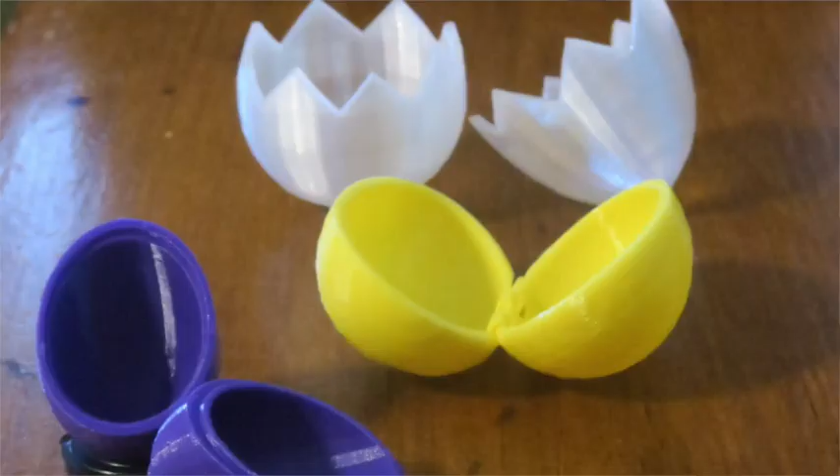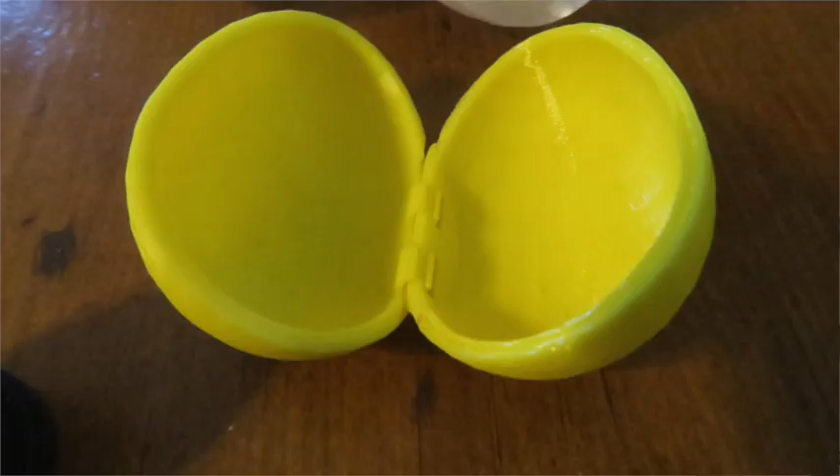In the second part, we're going to look at the second layer of our egg puzzle, and it's going to fit inside the first one. Just to remind you, our first puzzle was an egg shell with a zigzaggy opening, and inside this shell we're going to fit the second puzzle. For the second puzzle, we're going to make an egg that is cut vertically, and it's going to have a hinge so that it opens and closes like a door.

In order to do this, the first thing we have to do is actually design the hinge. This is a mechanical part, so we're going to design this and we'll have to make it relatively precise.

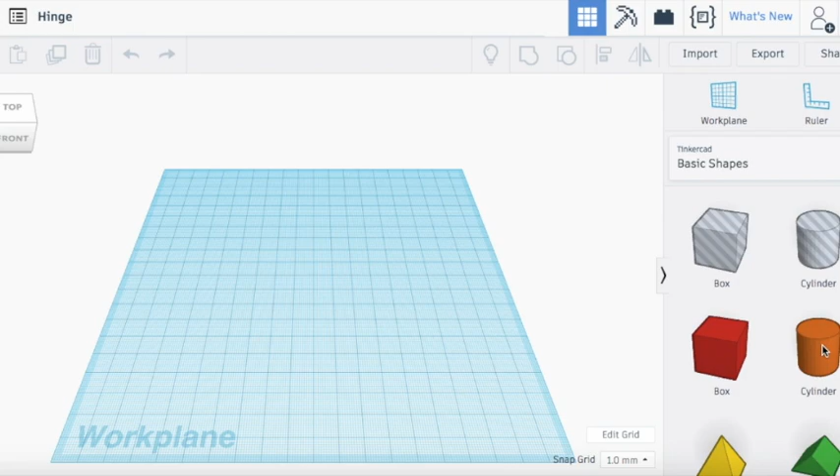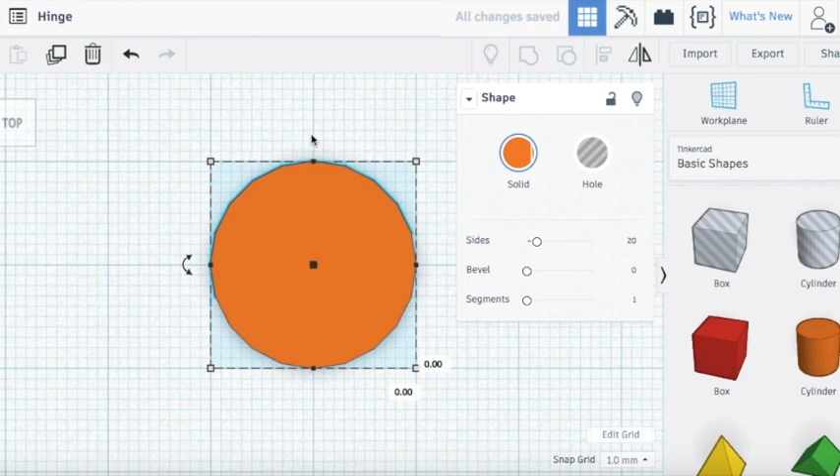So to construct the hinge, we're going to start with a cylinder. Again, just like before, I like to work in coordinates and be relatively precise. This cylinder has a radius of 10 millimeters, and I'll keep it 10 millimeters and make sure it's exactly centered on my work plane grid. My grid is set to 1 millimeter, so if I move things around, they always snap to 1 millimeter grids. I will also bring in two boxes.

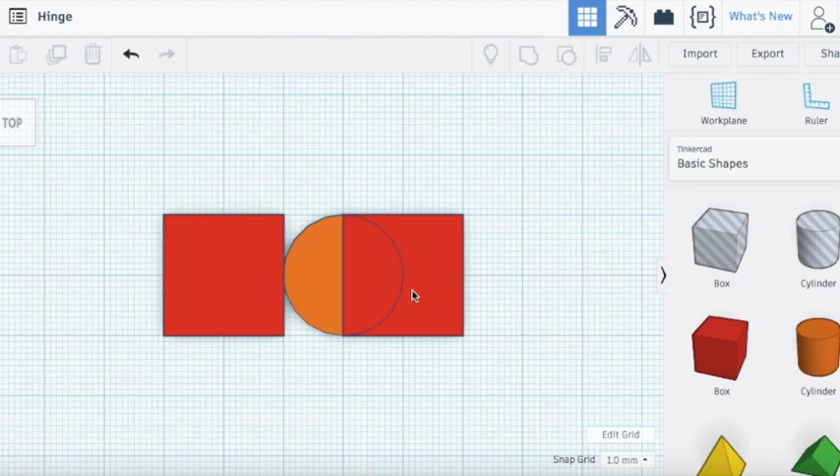One of them goes here and the other one will go a little further away over here. Let's switch to top view first. If I select all three pieces, I can center them. So this is going to be the basic shape of my hinge. This part will be fixed, this part will be moving, and it's going to move around this circle here. So let's construct an actual hinge out of this.

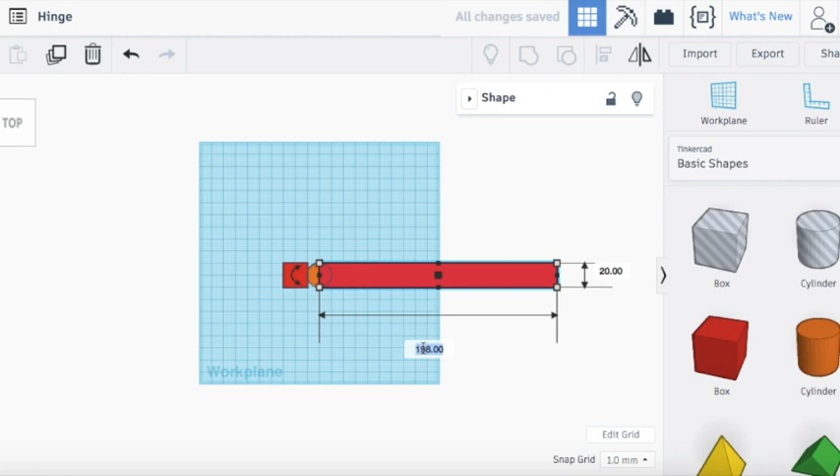I will make the hinge parts quite large, in fact much larger than they probably have to be. Let's keep the height at 20, but let's make the width, for example, 200 on this side, and I will do the same on the other side. So for this hinge, I'll just change the width. This little box here, I'll change the width to 200.

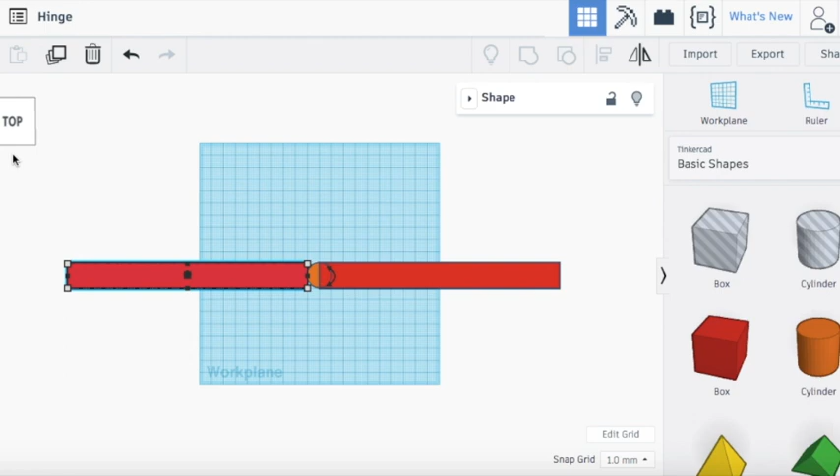Now, these two pieces, let's switch to front view. I will also want to make them much higher. I'll change their height to, for example, 300 - all three pieces. I'll change the height of the cylinder to 300, and I'll also change the height of the other piece to 300 as well. Well, actually, let's make it 400.

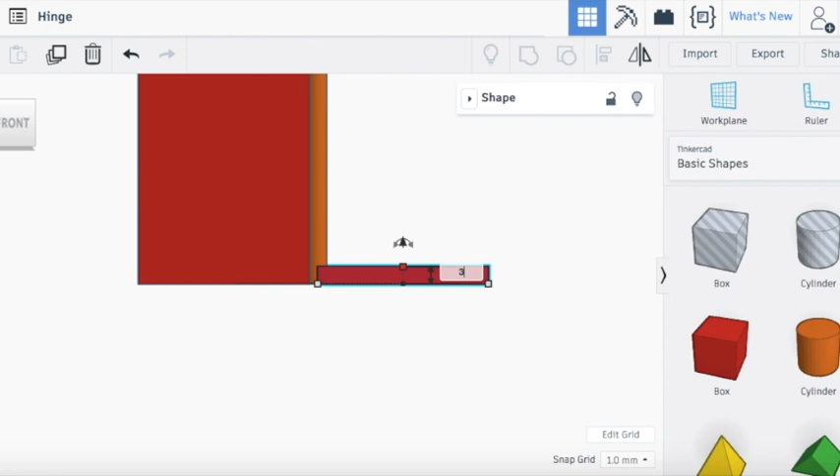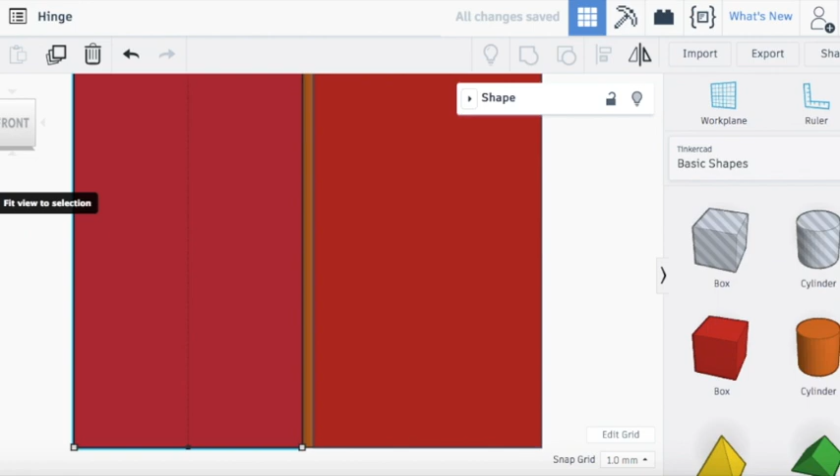That's even better. Let's make it 400 because it's really not a problem if it's too tall, but it will be a problem later on if it's not tall enough. So maybe 400 is a pretty good height for that. I'll also take all three of these pieces and bring them down a bit, by about 100 units, 100 millimeters. I forgot to select the cylinder, so I'm going to bring this one down by 100 units also. Everything snaps to the grid, so these numbers are precise.

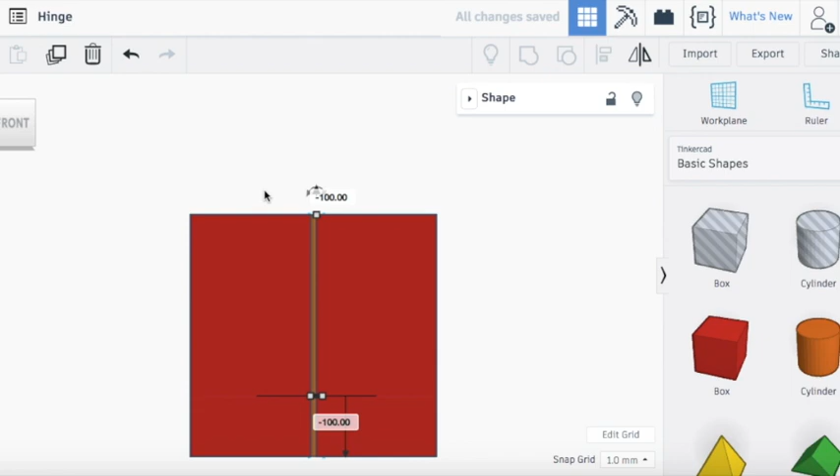Now, to make the actual hinge mechanism, for the time being, I'm going to hide this left piece so that we don't see it, and I'm going to work only on this right piece here. What I want to do essentially is cut two rectangular holes into this red shape.

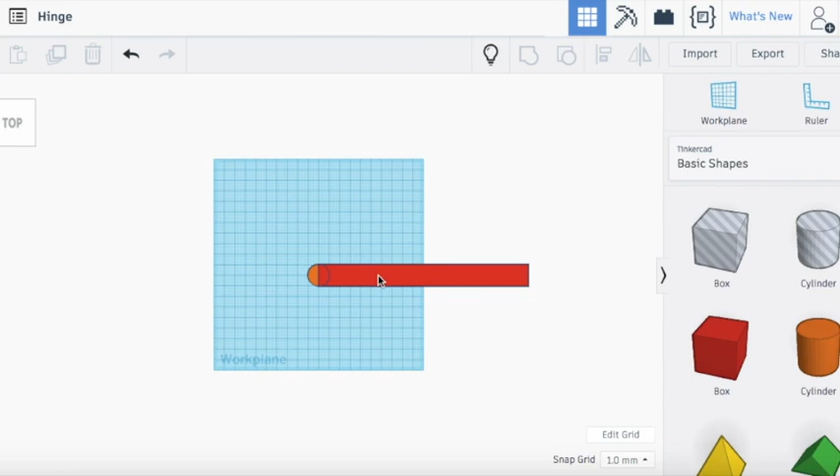So I will bring in - let's switch to top view actually - another box. What I'm going to do is make this cube a little bit bigger, let's make it 50 by 50. Right now I'm not worried about the height, but only about the width and the depth.

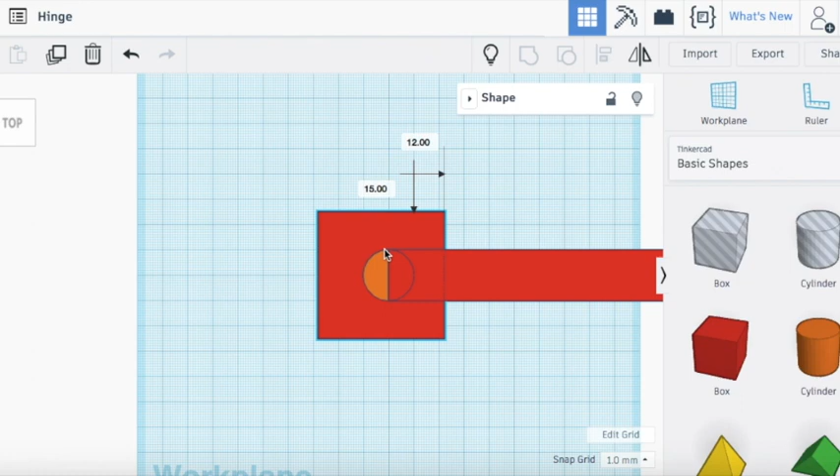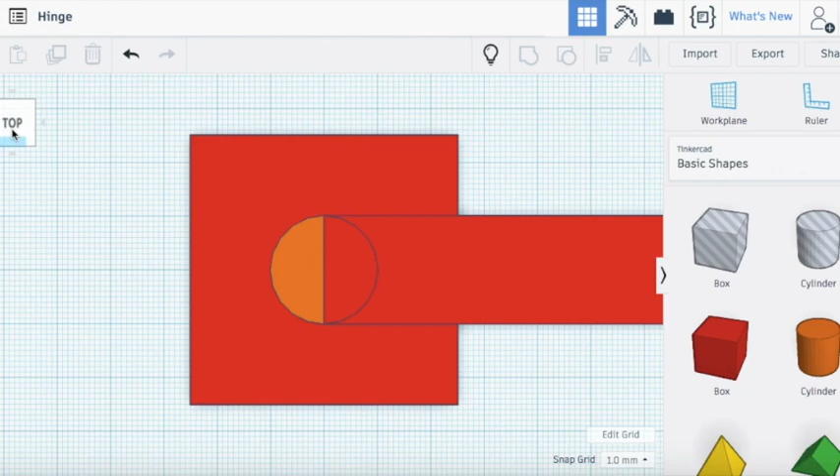So I will center the cube exactly around the center of my cylinder here. The way to do that is to zoom in on it and make sure this center is lined up with this line, and this center is lined up with this line. So I'm just going to move it a tad over and up, so now it's exactly centered here. And now let's switch to front view and worry about the height.

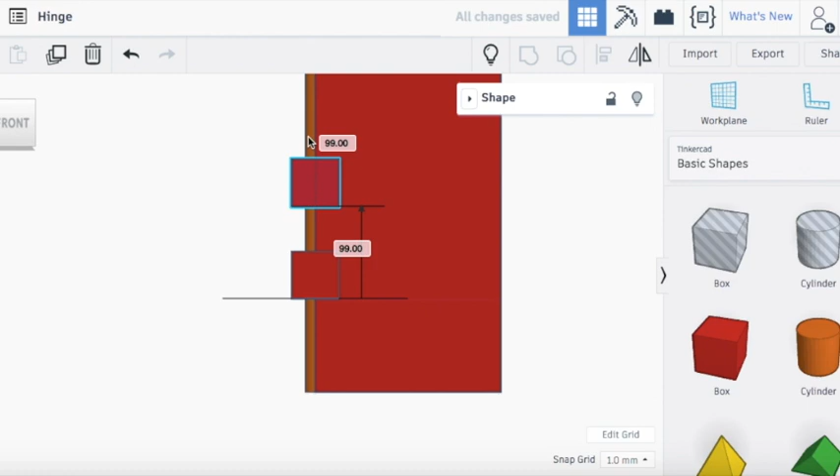50 millimeters is a pretty good height for the cutout I'm going to make here. So now I'll take this little cube, make a copy of it, and move the second copy 100 millimeters up. I want this to be exactly 100.

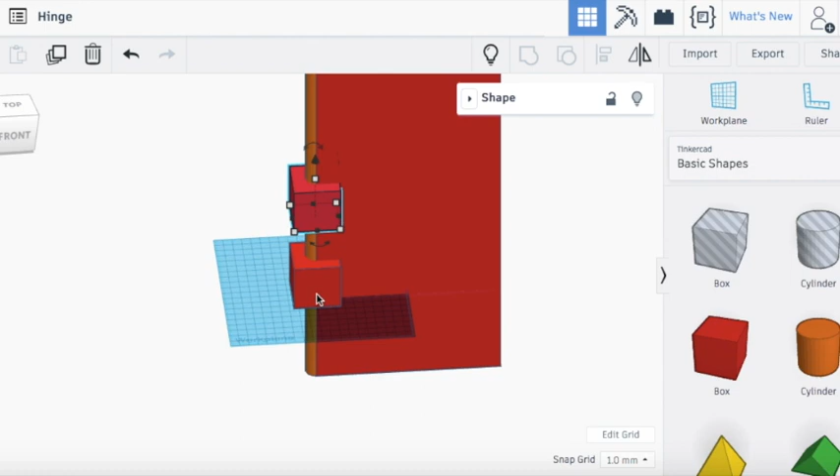In the three-dimensional view, I now have two cubes set into and around the cylinder, which is the moving part of the hinge. Now I'll select these two cubes using shift-click, which lets you select more than one piece. I'll change them into holes, then also select this wall part, and merge the three shapes. So now I have two cutouts exactly where I want them to be.

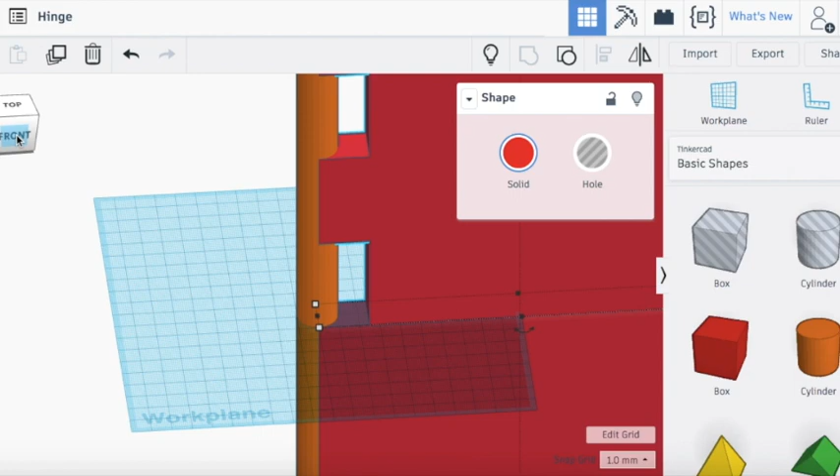Now that I've done that, I'm going to bring back the other piece that I've hidden. I click on the little light bulb here, and that shows all these pieces.

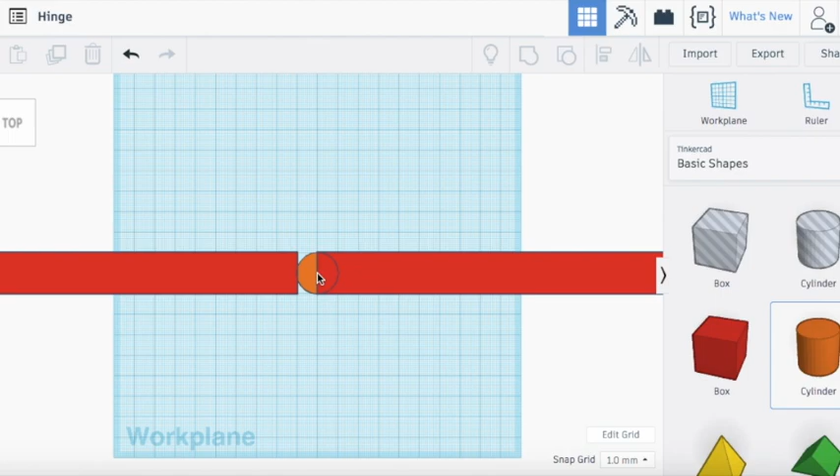So now we need to make the grips, the parts of the hinge that will actually grip onto this axis. I bring in another cylinder, and once again I'm going to center it exactly in the same place where the original cylinder was, except I'm going to change its measurement. Instead of a radius of 20, I'll give it a radius of 40.

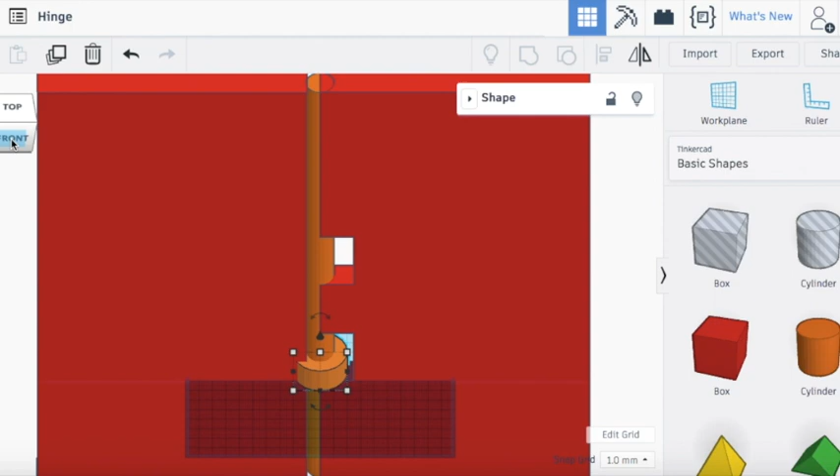In either direction. So now we have to make sure the height is correct. The size of these cutouts is exactly 50 millimeters, and I want a little bit to spare, so I'll make the height of the cylinder 40 millimeters. Then I'll also bring it up by 5 millimeters so that it sits exactly inside of this opening.

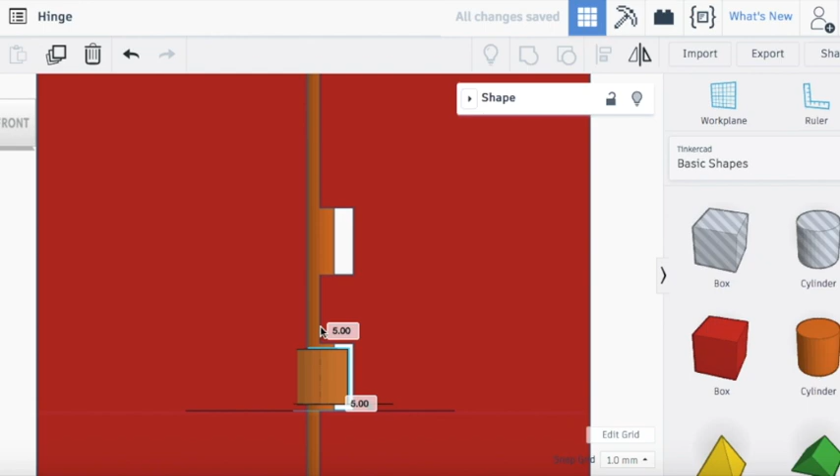Now I can duplicate it and bring the duplicated piece up by 100 millimeters. So it's up by 100 millimeters, and then it's 105 millimeters from the work plane, so it sits exactly inside of this opening here.

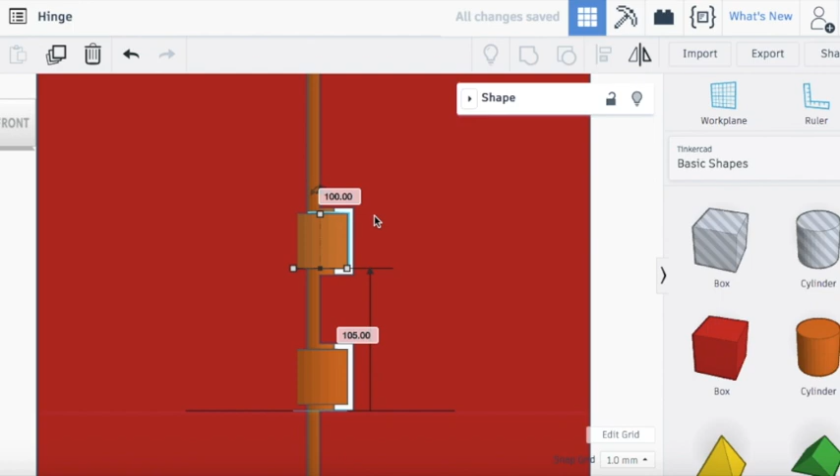Now, for the mechanism to actually work, first let's look at it in 3 dimensions. I have these pieces here, the cylinder also, and the wall. But if I temporarily hide these, you see there aren't yet any holes. So I need holes in these cylinders for the other cylinder to pass through, and I'm also going to need cutouts so the piece will actually be able to snap on.

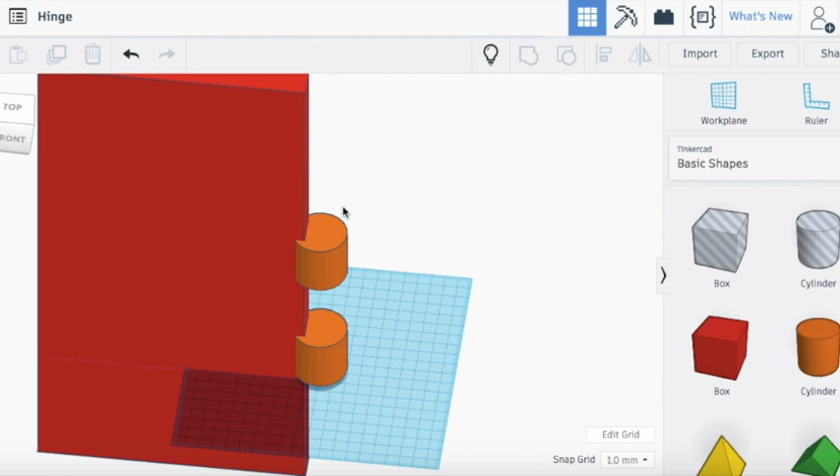So let's bring back the pieces that I've hidden. Let's temporarily hide just the big red wall.

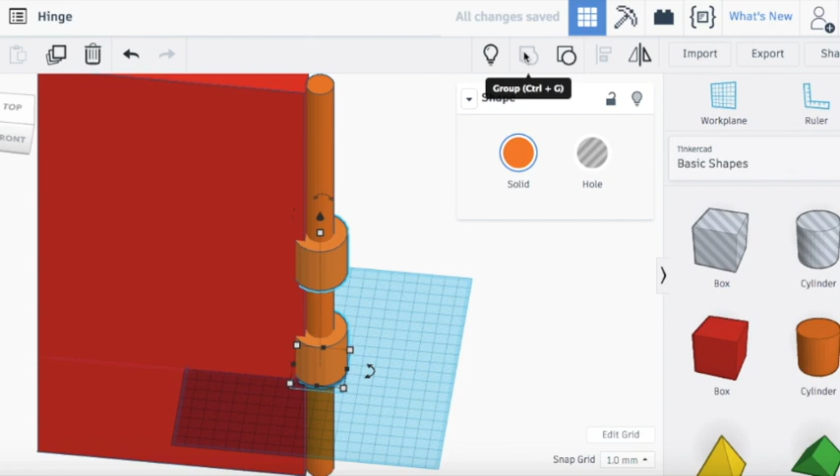The first thing I'll do is make a copy of the long cylinder. I'll change the copy to a hole, then also select these two guys, so now there are 3 shapes selected, these 2 hinge parts and the hole. If I group them, I've actually created the holes inside these 2 hinge parts. So if I now hide the original cylinder, you see there are holes in here now. Okay, so that will actually allow this piece to move.

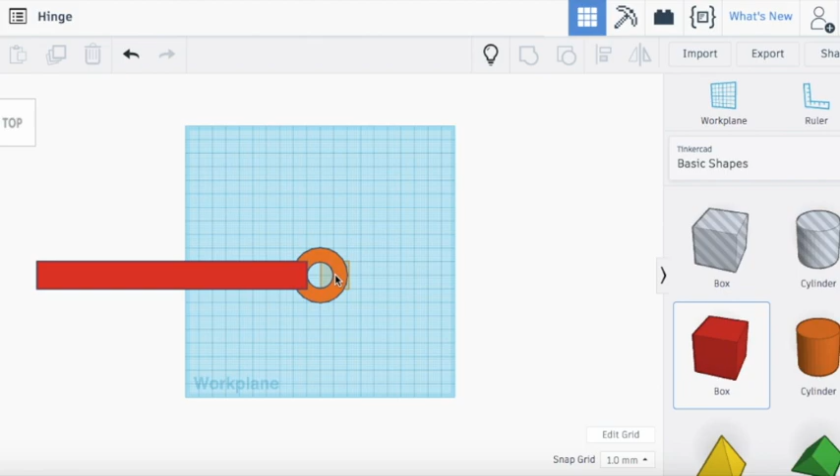And now I also need to create cutouts here. So let's switch back to top view, bring in another box, and center the box quite precisely in the location where it has to be. So actually I'll bring it over here.

I'll make it a little bit wider just in case. But I don't want it to be 20 millimeters wide, this snap-on piece, or else the hinge would just fall out. So I want this to be able to snap on, so I'll make it just a little bit narrower, taking away 2 millimeters on each side. Okay, so that's where the cutouts will be.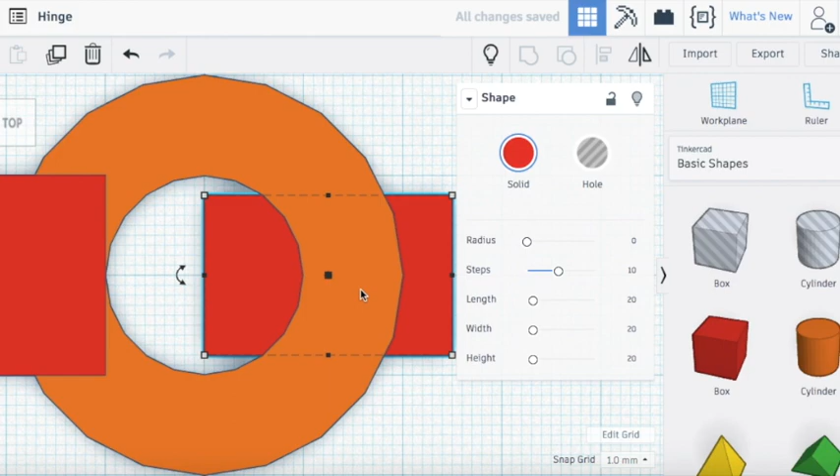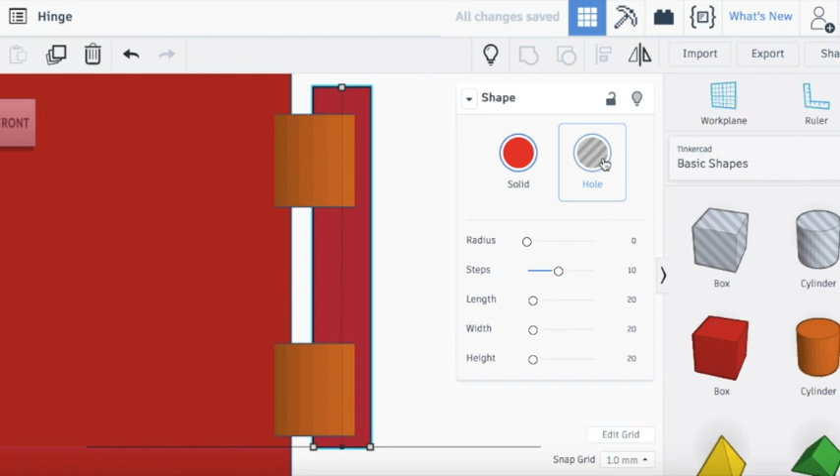Now let's switch to our front view. And of course we need to adjust the height and positioning of the little cutout piece. We don't have to be very precise about the vertical positioning, because in any case we're going to change it to a hole and then just merge it with these two pieces, and we might as well merge with that piece at the same time. Then regroup, and now we have what we wanted, which is the hinge with the cutouts and the snap-ons.

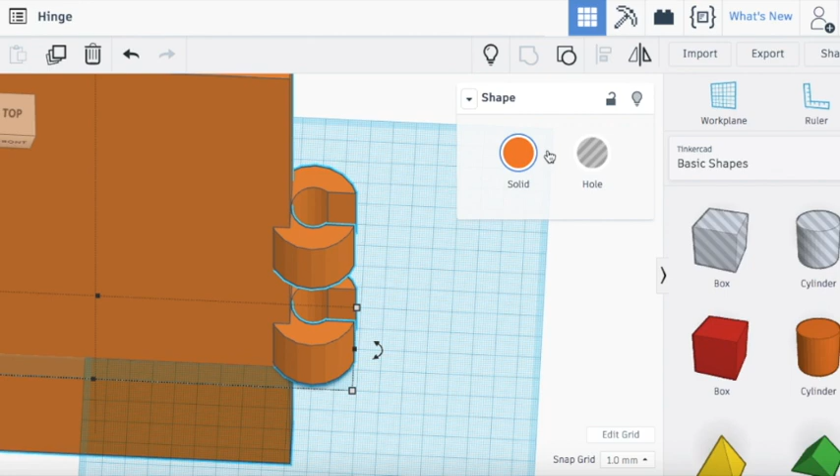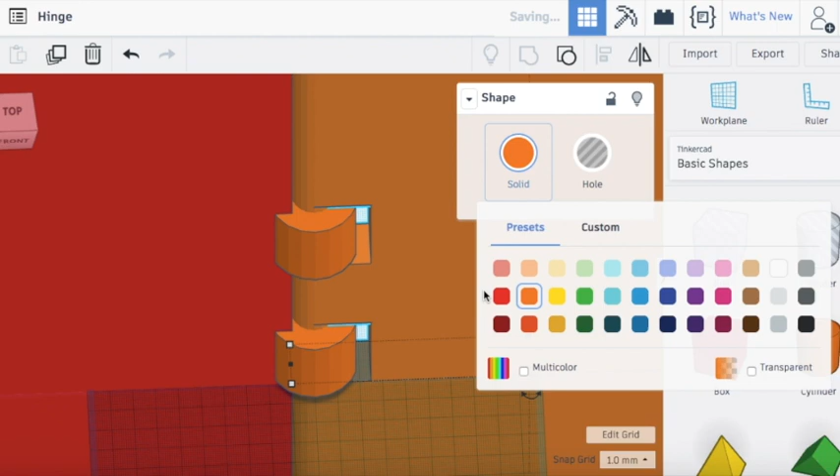I'm going to change the colors just for aesthetic reasons and make it multicolor so we can still see which part was the original wall and which part was the original cylinder. Now let's unhide the hidden pieces. So this orange piece and this red piece can also be merged, grouped together, and for these also select the multicolor option. And now our hinge is finished.

So let's just look at the whole thing in some kind of view where we can actually see it.